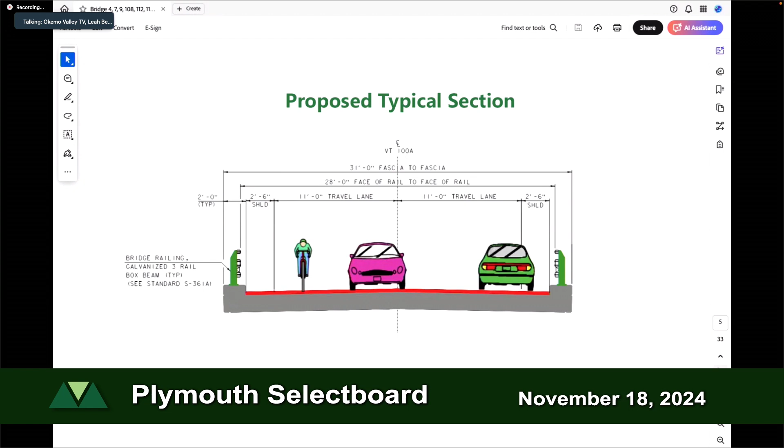All right, so this is a quick typical section kind of showing what we're doing. This basically shows 11-foot lanes for the travel lanes, which is the existing corridor through 100 and 100A. Each of the shoulders are a little varying through each bridge, but we are going to attempt to match those existing shoulders. So you're not going to see a lot of difference as far as roadway width for these replacements, but there is going to be new bridge rail. On the left, you can see the new bridge rail that meets current design standards. So that'll probably be the biggest change for the projects on 100A.

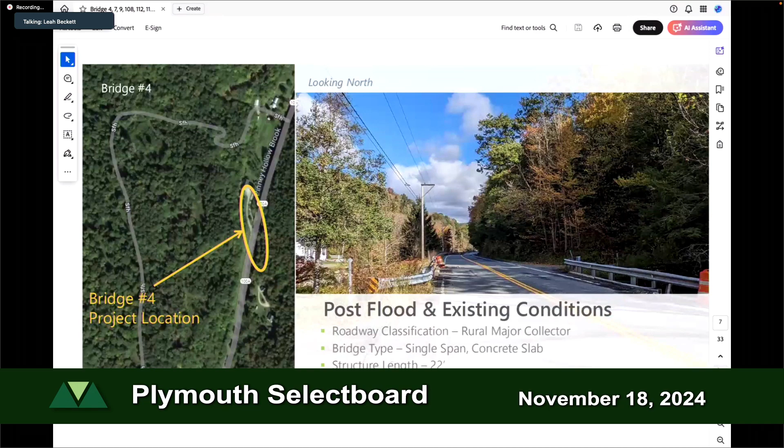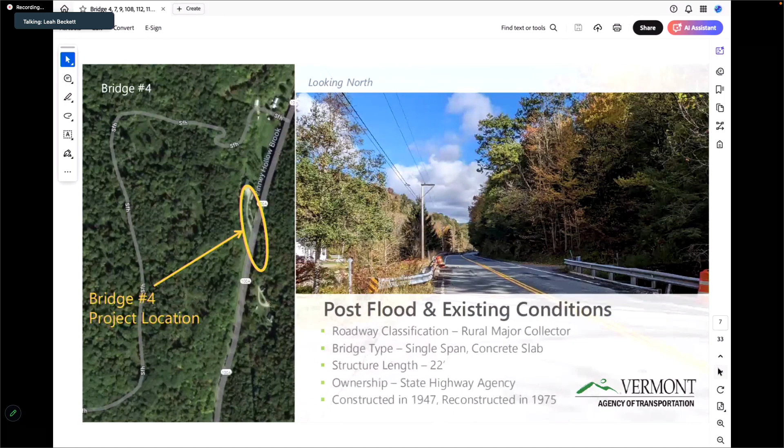All right, so I'll start off with Bridge 4. That's the one that's furthest south. These bridges are going to look a lot alike, but they go along the corridor of Route 100A. The river's kind of following the valley on the right. It crosses the road at a steep angle. And what they did was they had a narrow bridge, and they constricted the channel when the bridges were originally put in. So this particular structure is only 22 feet long. It was constructed in 1947, and it was reconstructed and widened in 1975.

Show the next slide. There's a quick photograph showing some efflorescence—that's the white material. You can see minerals leaching out of the concrete, and there's been stone fill repairs done at the 2023 site. You can tell it's not in the best condition.

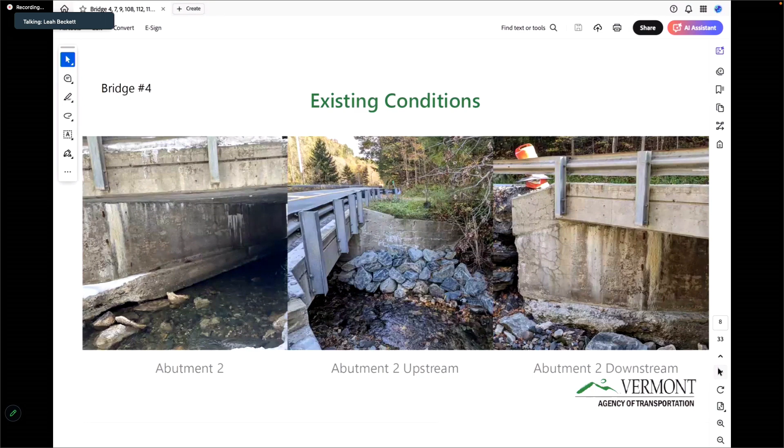Where on 100 is that one? You can go back to the satellite view. I don't know if you can tell, they all look very similar, so it's hard to tell what mile marker it is. That's okay, Rick—it's just north of my driveway. That's the one, yeah, the first one there.

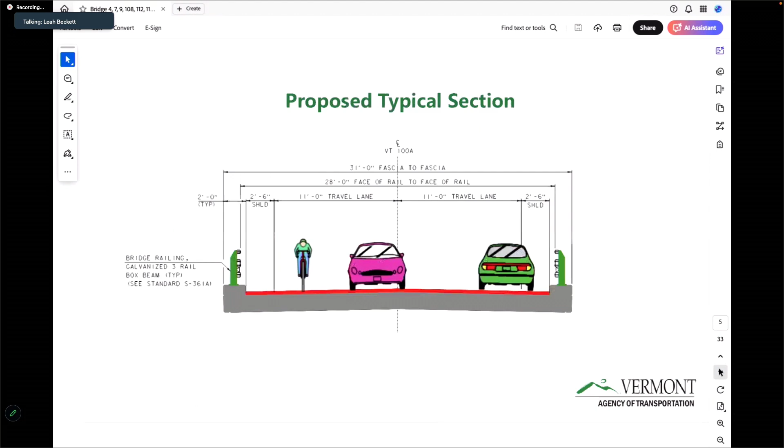Okay, well this is Bridge 4 that we just talked about. So this shows a typical section—it's hard to see, but the grayed out area is where the existing bridge is, in the middle of that gray footprint. The gray area is the new structure, which is skewed to line up a little better with the current alignment of the stream. The new span is 51 feet, 31 feet out to out, and the stream will be reestablished back to its natural state. The plan for this one is construction in 2027.

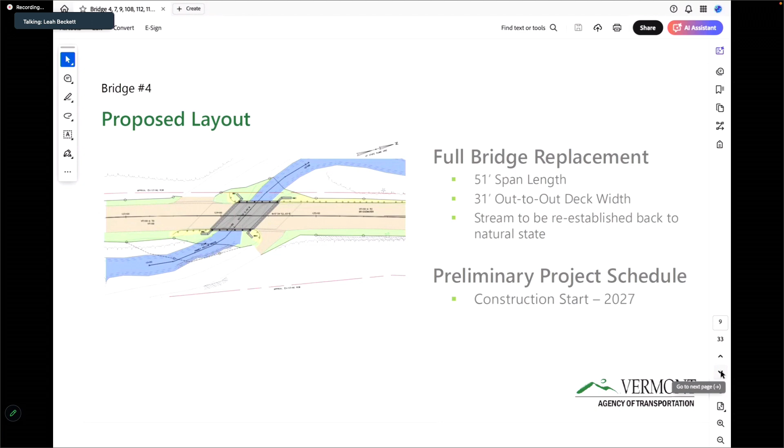And this is Bridge 7. It looks a little different—this is a concrete T-beam. Still not the best; you can see some exposed rebar there. You can go to the next slide.

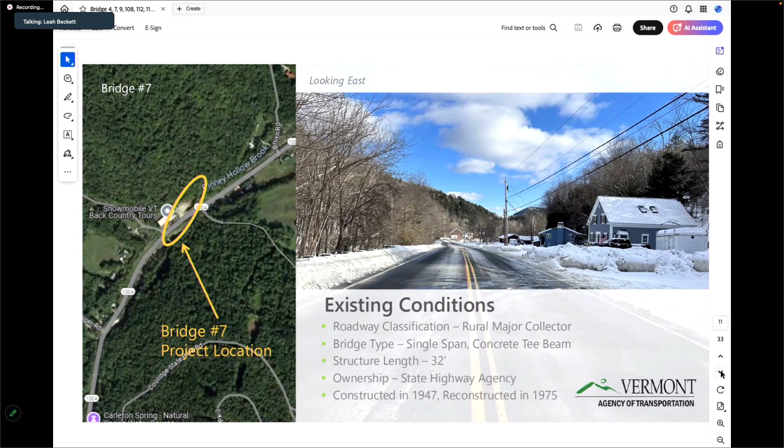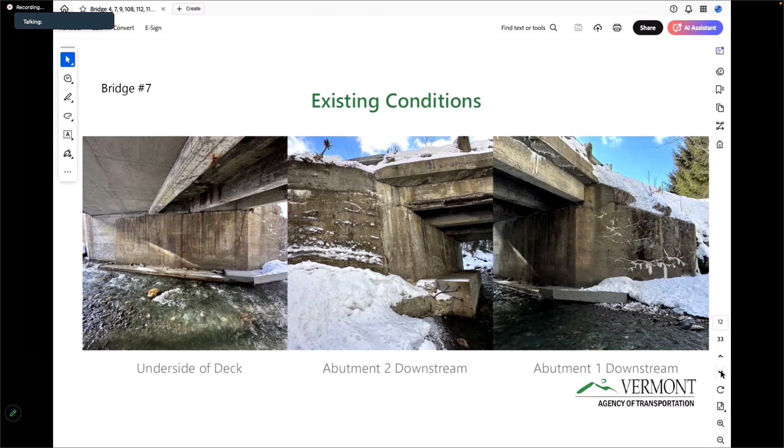You can see a lot of efflorescence, some exposed rebar. Could you explain what that efflorescence actually is? It's the minerals inside the concrete—you have the paste, the aggregate and the stone, and you also have the cementitious materials and the minerals. So if it cracks and moisture gets in there, it leaches out over time. Basically it's deterioration of the concrete.

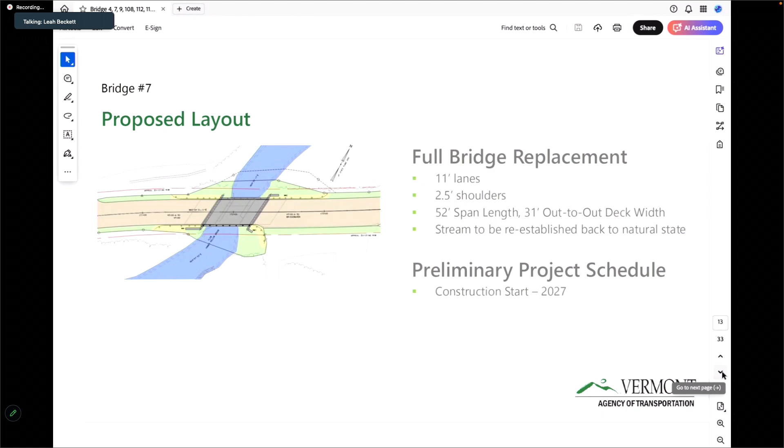Next slide. So this one is 11-foot lanes, 2.5-foot shoulders, and we're increasing it to 52 foot, with 31 feet out to out. This one will also be constructed in the summer of 2027.

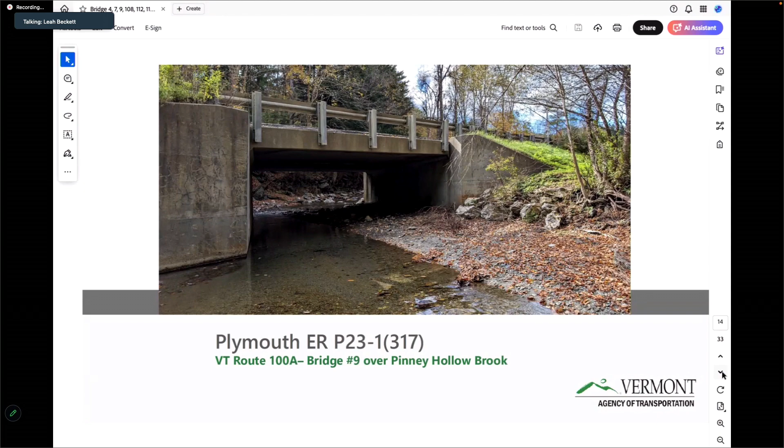All right, Bridge 9—this is the one that's next to your house, Rick. So this is a slab bridge. Next slide. This was 31 feet right now, and this one was constructed in 1984.

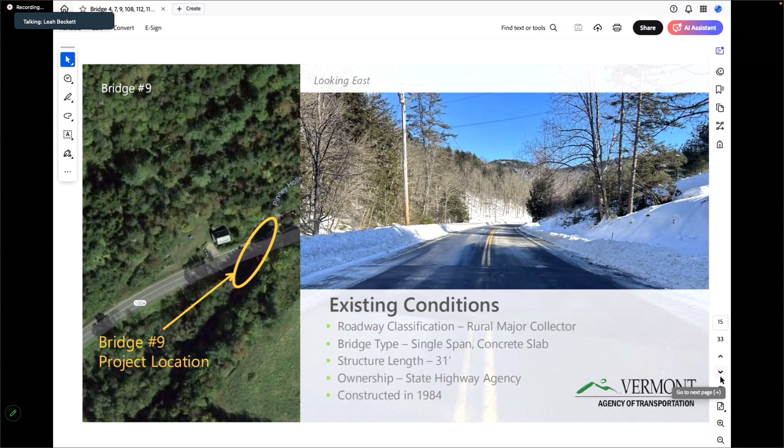Sorry, question—I just missed it. What's the start date for Bridge number 7? Bridge number 7 is in the summer of 2027. So both of them are 2027? Correct, yep. Bridge 9 has an existing right-of-way that was large enough that we didn't need to go through the right-of-way process, which allowed us to accelerate it so we can build it this summer. We're planning on advertising that soon.

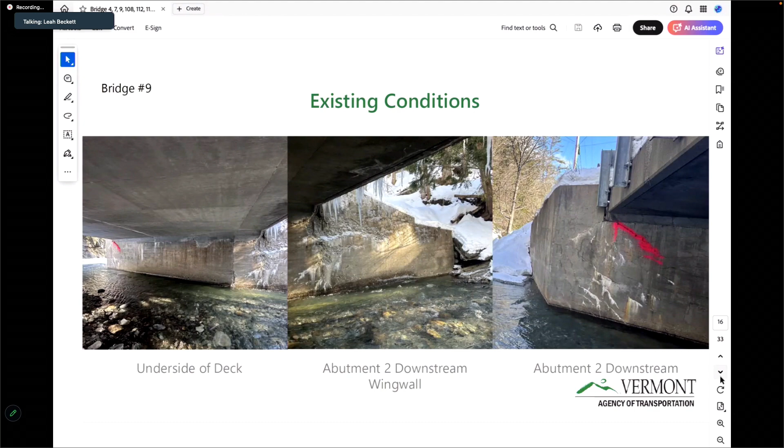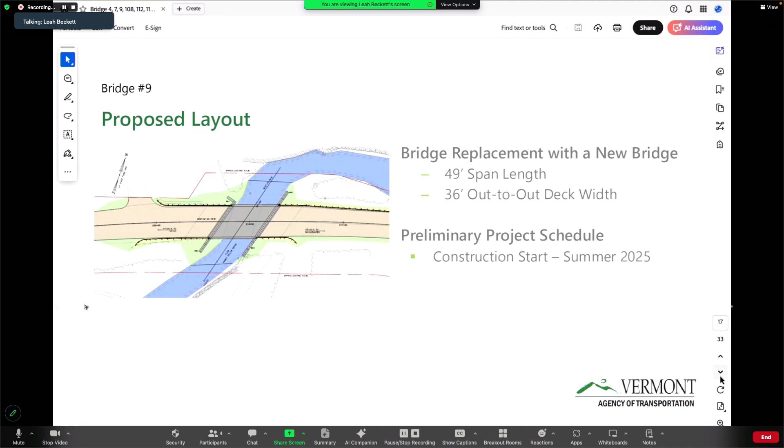But similar situation—concrete's in similar condition, you can see the red line here. There's a crack that our inspectors highlighted; they monitor it and inspect the bridges every two years to see if it's getting worse. You also see that photo on the right—that abutment is really in the channel, so not ideal for hydraulics. We're increasing that span to 49 feet, and this bridge is 36 feet out to out, and that's the one we're constructing next summer.

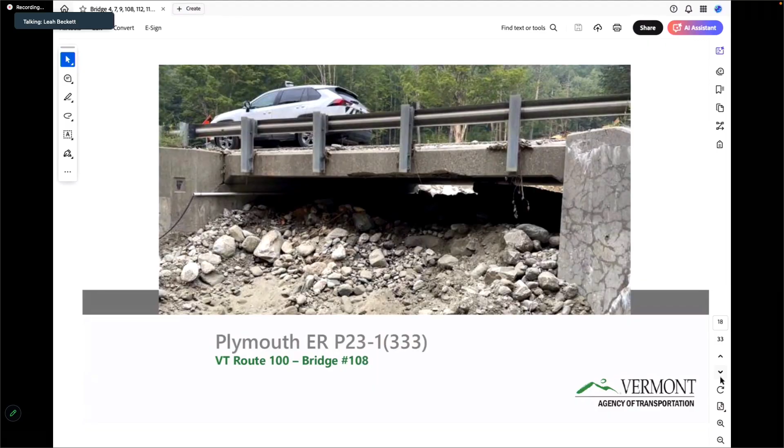All right, with that one, that's all the 100A bridges right now. I'll turn it over to you folks for 100. All righty, thanks Leah. Gary LaRoche.

The biggest issue with this particular site is there's an enormous sediment source upstream of the bridge. When you get these large rain events, such as Hurricane Irene or the 2023 storm, a large slug of sediment comes downstream and essentially plugs up the bridge and overtops the road and so forth.

Okay, so moving on to Bridge 112. This structure is an 11-foot wide, 7-foot high squash pipe structure. There was heavy flow through this area during the storm as well.

As a resiliency project, this structure is reaching toward the end of its service life. There were some bolt line cracks observed after the storm event, though this structure was inspected just prior to the storm or event, so we understand that those are new.

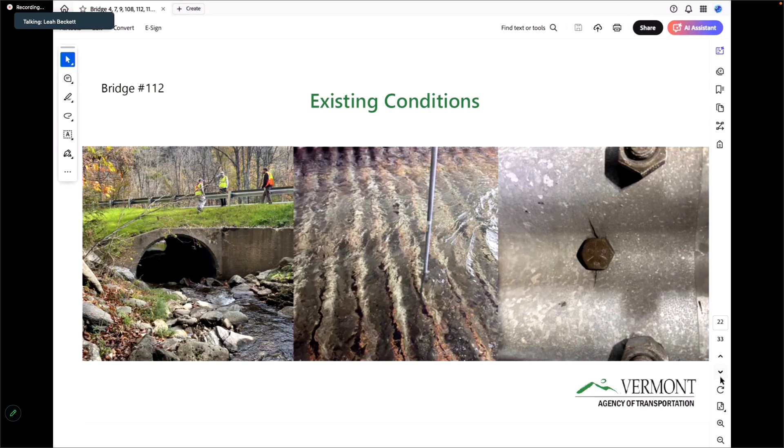We're looking to replace that structure with a brand new 20-foot box culvert that's capable of passing the hydraulic flow, and it's also going to accommodate aquatic organism passage.

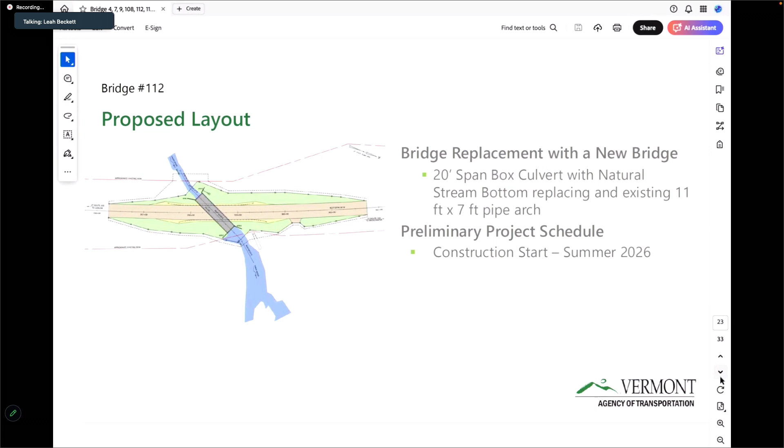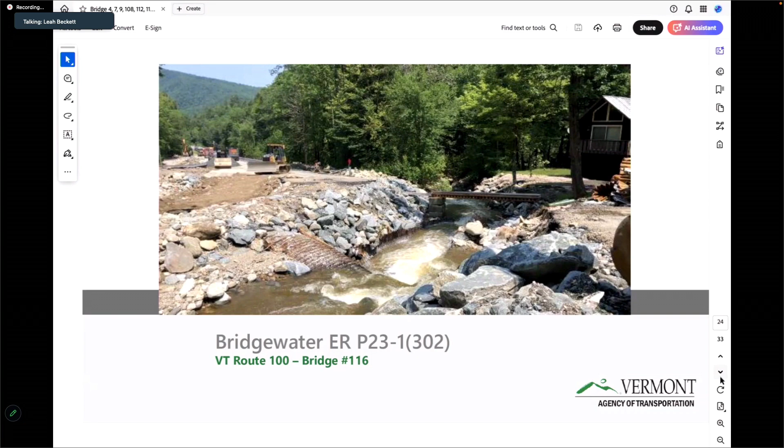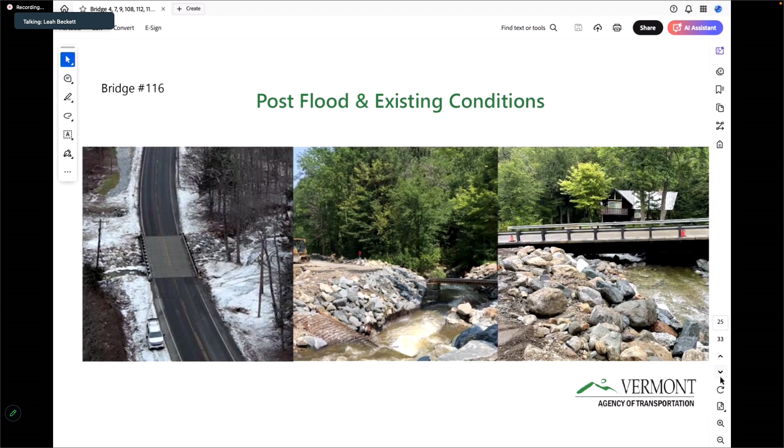Finally, the last bridge is the northernmost bridge close to the Plymouth Bridgewater town line. This is Bridge 116. This bridge, or the culvert that was there, was also an 11-foot wide, 7-foot high squash pipe, but it was demolished by the floodwaters. This site also receives a lot of sediment transport during large storm events like Irene and the 2023 storm.

This large sediment source releases - it gathers up sediment through time, and once it lets go, it all comes down at once, and it destroyed the existing structure. So during the emergency event, we put in a temporary bridge in that location, which is going to be replaced by a new bridge.

So for the new bridge, it's going to be 60 feet long, 34 feet out to out for the deck width. The stream through the area is going to undergo some pretty major realignment and construction. The stream will be shifted slightly away from the dwelling downstream of the structure, creating a more resilient, maintainable stream in the future.

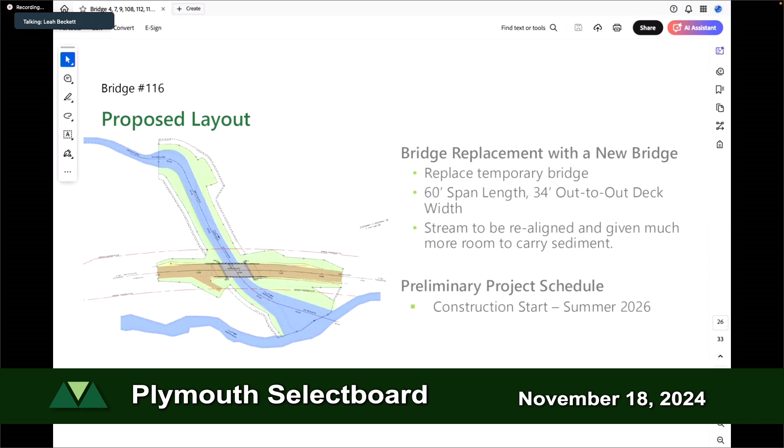Downstream of the structure, you can see that triangle shape of blue on the map. That's essentially where the sediment is transported to, and it's given the opportunity to settle out in that location, since it's a pretty sharp or steep grade into the channel through that area. When another storm event comes through, they can dig that out, and then you're back to normal.

And I'll turn it over to Tom to talk about maintenance of traffic and the schedule.

Yeah, so this is the part that everyone cares about, how it's going to impact my commute, my daily getting around. What we did here is we showed the map, and if you live on the little triangle, the Vermont 100A, Route 4, 100 triangle, the detours are going to be more difficult, because you might end up having to go all the way around to get to your destination. What we've shown here is how the detour is going to impact through traffic.

So we've shown Ludlow as a southern terminus, going from Ludlow to Bridgewater, and right now that might take you 27 minutes. In 2025, when we have bridges out on 100A, you've got to go up around to Route 4 and take the long way around, and for that through traffic it only adds 4 minutes total travel time. But we recognize that for local folks, that can be a lot more difficult, because you'll be kind of looping around there.

We tried to give you estimates of closure durations here. So we're trying to plan these closures in 2027 to be in the 28-day range, and we're trying to do them during the summertime when there isn't bus traffic, there isn't school traffic. We can't do bridges 4 and 7 at the same time because there would be an island in between where no one could get north or south, so they'll be done sequentially, staggered, but in that same summer.

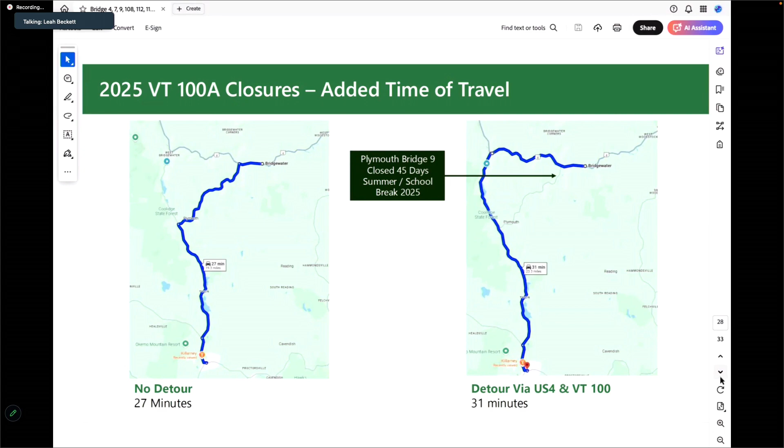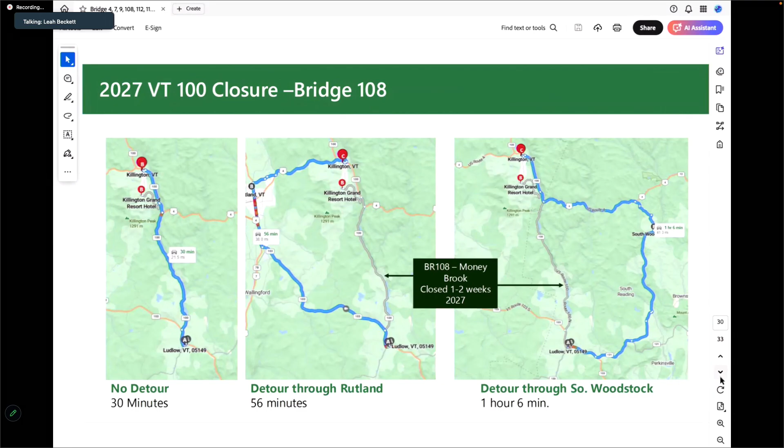Would that be in the middle of summer, or more into the off-season? That's interesting, and that's the reason we're here, because there is some flexibility with that - if there's a preference for one or the other, we'd love to hear it. Traffic in July and August is definitely busier than, say, May or April, so if you can do it early season... or November. Too late, it is too late for the stream. Winter would be better for the stream.

Total disaster, but that's not gonna happen anyway. Okay, that's good to understand, though.

I mean, if there's times we definitely want to avoid, we obviously wouldn't try and plan that during leaf peeping season, we recognize that one, but if there are other local times when it's substantially busier than other times, please let us know.

Has any thought been given to how this is going to affect, I'm being totally selfish when I say this, local businesses? Because if you do this, it's going to affect my sales immensely. People aren't going to travel around to come to the store, and this is like a major hub for people. I'm really concerned about how it's going to affect the operations at the store, and I don't know if anybody at the state thought about this. How is it going to affect local businesses?

So the Accelerated Bridge Program's been around since 2011. Bridge closures happen all over the state. We've done closures in downtown Woodstock and all different local areas around here, and absolutely, it affects businesses. That's why we call it Accelerated Bridge Projects, right? Because we're doing a short duration, understanding it's going to be a big impact. That's why we're trying to get it out versus having an entire year. It's going to be a portion of it.

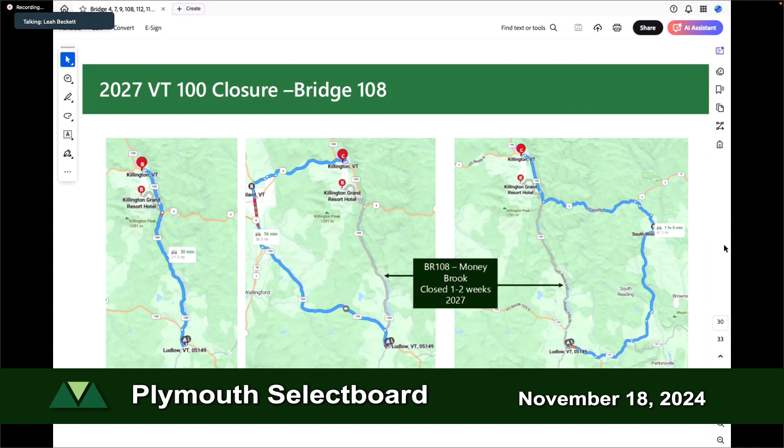Okay, all right, I think I know the answer, but I just want to be clear, 112 and 116 are sequential, not simultaneous? Correct. Now I have a question, we just had this situation this afternoon, shutting that 100 off at Money Brook.

How do we get our fire apparatus from Plymouth? We have a big fire in Plymouth, and a lot of people came up from Proctor, Chester. You guys give that any thought? Because you're gonna be locking us off from help from the south.

Yep, we're gonna rely on... Before any bridge closure is commenced, there's a required meeting with the contractor and all the public services, emergency aid, fire, police, to all meet and have a plan prior to going into that closure period.

Okay, have you ever thought about a single lane temporary bridge with a traffic light, for Money Brook, somehow? Yeah, I'm just giving a suggestion, because I hate to see us, if we were shut off right now, we'd really have a problem in Plymouth with that fire. I just want you guys on this, it's probably one case scenario, but we have a major fire, and we have a lot of people from Proctor, Ludlow, Chester, Wallingford, Mount Holly, that's the only way they can get here.